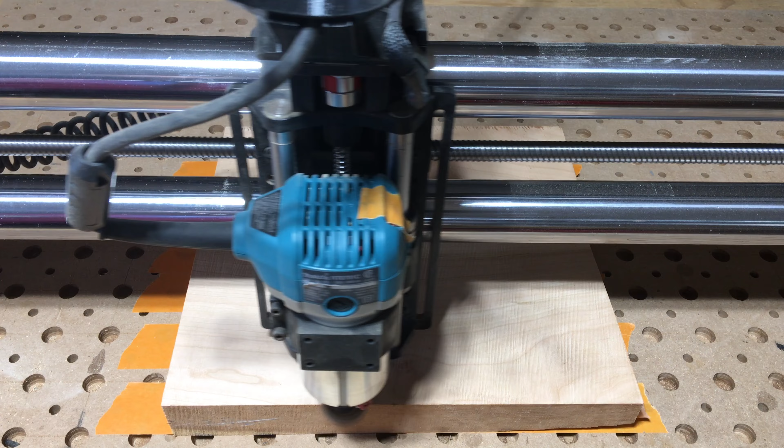We need to flatten the boards to remove the bandsaw marks and make sure that the CNC cuts everything to the proper depth later. A few years ago I created a web form that gathers the CNC, board, and bit parameters needed to flatten boards to whatever height you specify. It takes those parameters and generates a G-code flattening program you can run on your CNC. You're seeing the results of that in action now. It's a small thing, but when you do this several hundred times, that can end up with a lot of time savings. At the moment, it has generated over 2,800 programs since I created it.

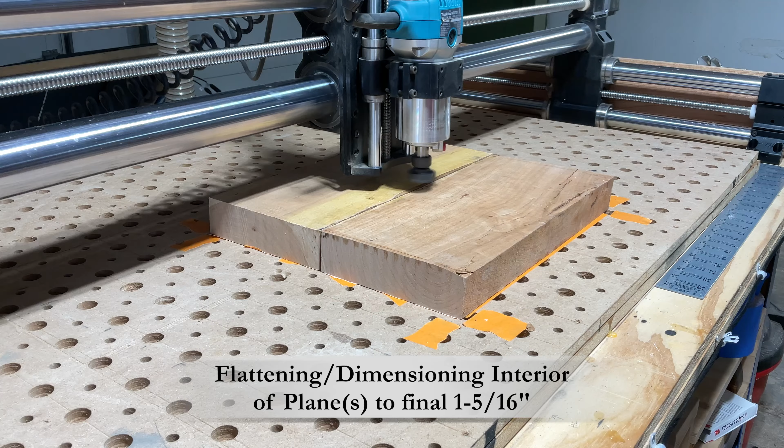This program runs back and forth, lowering the depth each time. I've cut out the multiple depths since they all look the same, and if you've seen one flattening pass, you've seen them all. And a couple more minutes with the 3M Xtract sander at 120 grit.

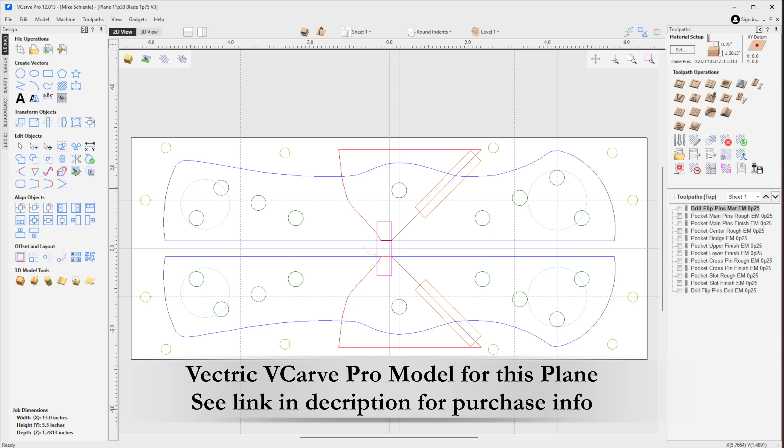The interior of the hand plane is created with a single 1/4 inch spiral bit. If your CNC has an automated tool changer or ATC, I would suggest using an upcut bit for the 2 sets of alignment holes and a downcut bit for the rest of the interior. I don't have an ATC, so I just cut the interior with a single downcut bit.

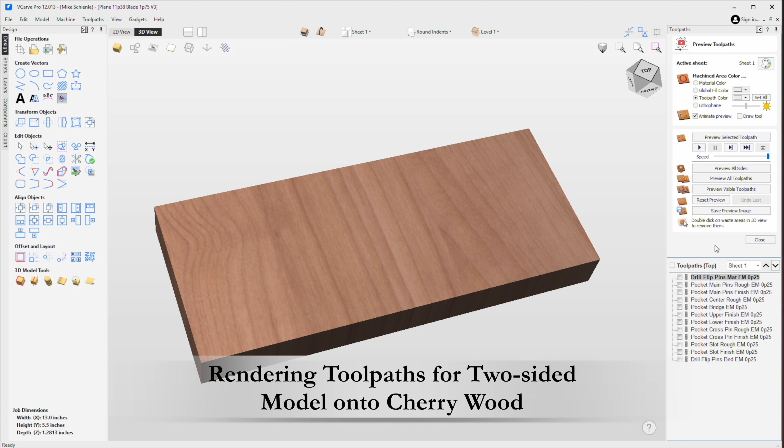The exterior is created with 2 bits. The first is a downcut 1/4 inch end mill spiral bit. Since this is the exterior edges of the plane, it's important that the fibers are not pulled away from the wood, which would leave a splintered or tattered exterior surface. The second bit is a 1/4 inch downcut ball nose bit. For the same reasons as a downcut end mill, the ball nose bit should also be downcut to prevent tear out of the edges.

We're starting with the interior of the hand plane. The first set of 1/4-inch holes are the alignment pins, which are used when the plane is flipped to cut the exterior.

The second set of larger 3/8-inch holes are used to align the two halves of the plane when they are glued together. These are done in 2 passes, called roughing and finishing, to provide better alignment for the glue-up.

The blade bed and chip cavity are now being cut. The blade assembly rests against the bed on the right-hand side of the plane, and the wood chips are collected in the left-hand side of the cavity.

A hole for the pin and a slot for the cap screw are the final cuts after the cavity is created. The pin goes into the center hole, and the slot allows the cap screw of the blade assembly to slide into the bed, so all the force of the wedge and pin are registered against the blade and bed.

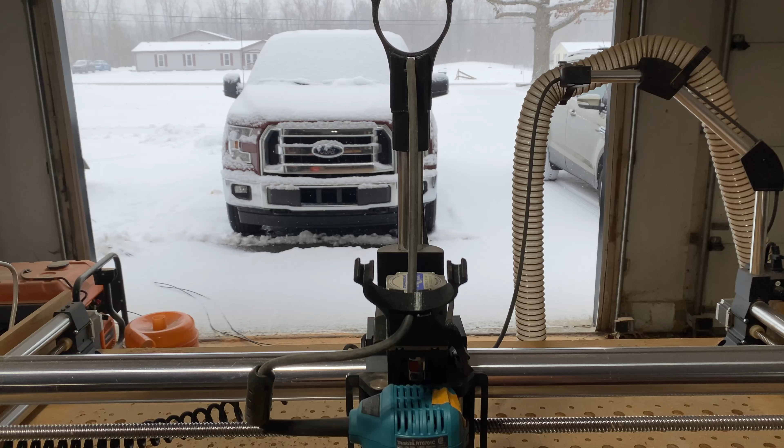As you can see, we have perfect CNC weather today. It is 34 degrees inside the shop. I guess about 16 degrees outside the shop. Getting a nice snowfall. We got a couple inches so far this morning and just enjoying it.

We're now cutting the exterior of the plane, starting with a 1/4-inch downcut spiral end mill. We cut the shape of the plane out first, leaving it connected to the frame of the wood with several tabs. The tabs act as connectors to the frame, so the majority of the milling can be done and still retain some rigidity.

You'll see the shape profile is being cut out in 3 phases. The first phase cuts through the wood at full width, but a fairly shallow depth of 1/4 inch per pass. With the total depth of each half of the plane being just over 1 1/4 inches, this means it needs 6 passes to completely cut through.

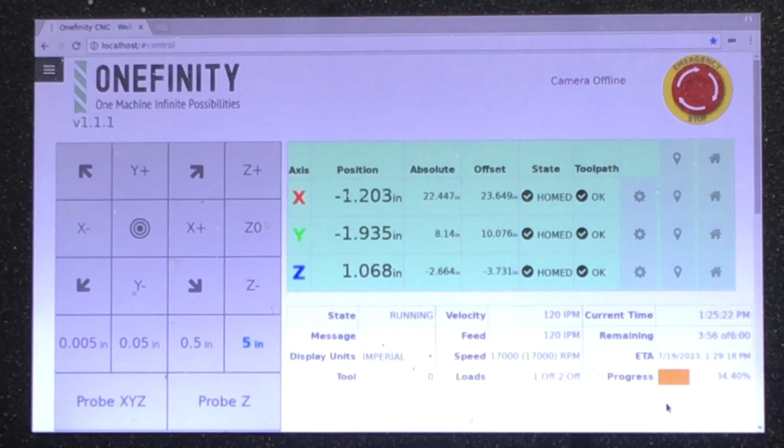This will leave a fairly rough surface, so a smoothing pass is done next, which is done in 2 depths while only removing 1/100th of an inch each time. Finally, a finishing pass runs in the opposite direction of the smoothing pass, which is called a climb cut, and removes a final 1/100th of an inch of material. This all combines to create a very smooth cut that needs little to no sanding.

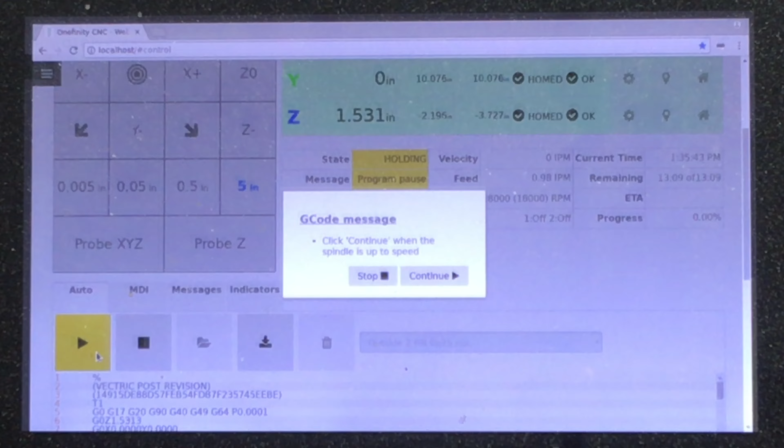We've switched to our 1/4 inch ball nose bit to round over the edges of the plane and to add some dimples for finger and thumb holes. The roundover is done by taking small increments along the sides and upper edges of the plane, leaving the bottom or sole flat.

A downcut bit is used so the edges of the plane are not lifted away, which would cause splintering. The downcut pushes the wood fibers against the rest of the wood, which provides the support for the fibers to be sheared instead of lifted. This is also true for the dimples, where the wood fibers are cut toward the supporting wood.

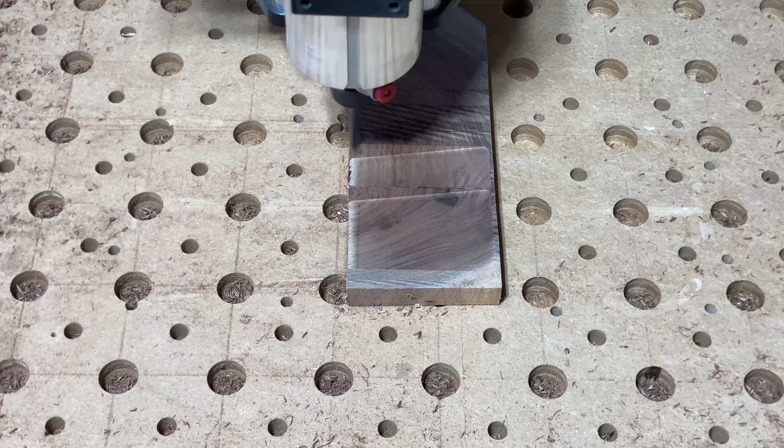Well, that wraps up this project.